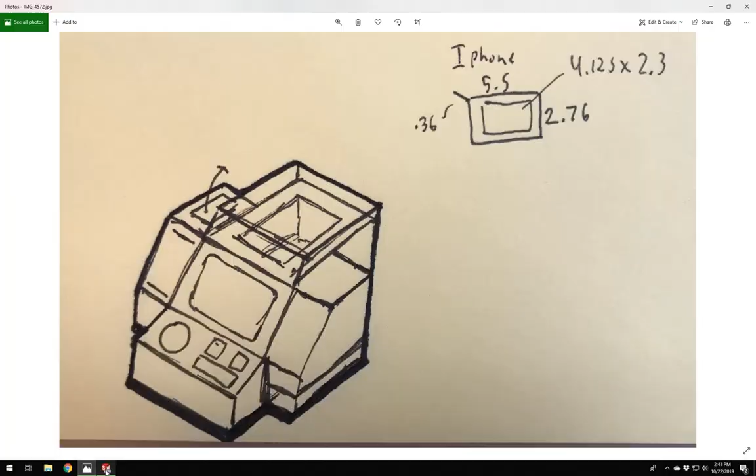And so now we have to decide how we want to begin. What we're going to do is we're first going to model this center section, and we'll attach these two side boxes. We're going to model the big side panels first, and then just connect everything in between. So the first step we actually want to do is we're going to begin on the top plane.

We're just going to make a sketch, and this is going to help us define the size of our object. So we're going to pull out a rectangle, pretty straightforward. Let's make it 14 inches deep and 10 inches wide. And so this seems like a pretty good place to start.

Our sketch is now fully defined. You can see that all our lines are black. Exit the sketch, swing back to isometric view.

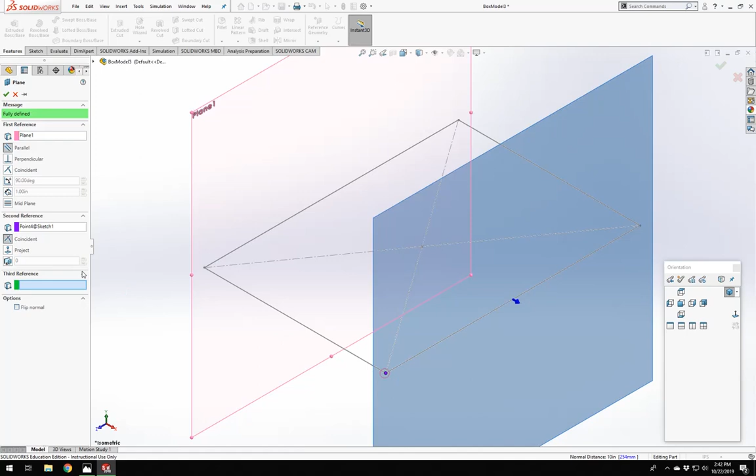So now, in order to do side panels, we're going to create some reference geometry - two planes, which will basically be the sides, the sidemost extents of our rice cooker. So we're going to go with the right plane, and we're going to bring that out to this line, and we're going to do the same thing out to that line. And we can do it off of plane 1 or the right plane - it won't matter in this case.

So now we've got these two planes, sort of TIE fighter shape, I guess. But say we wanted this to be slightly wider. A really easy way to do this is if we just click on sketch 1 - don't actually edit it, just click it - it'll bring up its dimensions. If we double click on one of those, we can edit them. And so we can say we actually want this to be 12 inches.

So we enter 12, we hit enter. And then I'm going to hit Control B, same as clicking this button up here, which just rebuilds, so it'll refresh what we're seeing.

So now we've got our size correct. So now it's time that we actually start modeling each panel.

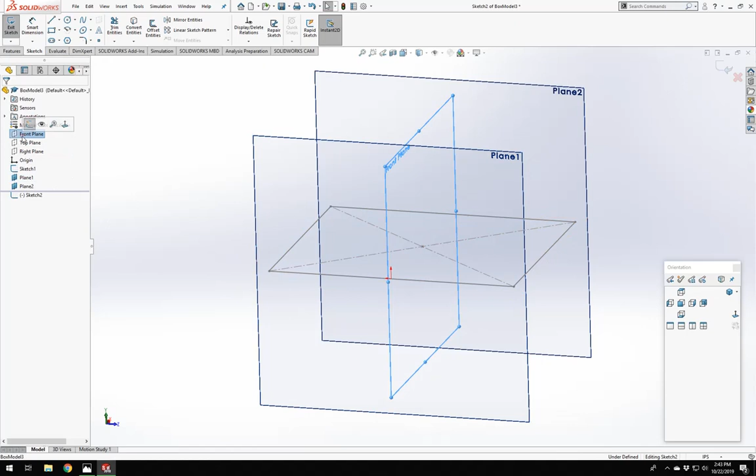We're going to start on plane 1 and say sketch, view that normal. I'm actually going to flip it around, so our front view here is going to be to the right. So when we view our sketch normally, our front is going to be over here.

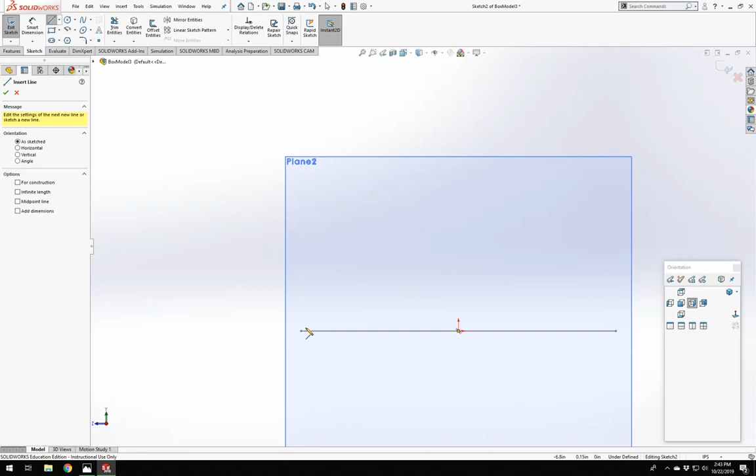What we're going to do is also treat the top plane as the bottom, as the ground plane. Really quickly, roughing it, we're just going to draw in our shape, sort of that shape. There, we've got our basic form here.

And so now we probably want to go in and start defining sizes and dimensions. One thing we're also going to do is add some feet to this. Most products don't actually sit straight on the ground, most sit off on some little raised portion, so we're going to add in some little feet.

So let's go ahead and start throwing some dimensions on here. A lot of these dimensions are going to be arbitrary, or just what seems right for this demo. If I was really planning this out, I'd probably find a similar object that exists and measure it to see what makes sense - go find a rice cooker and see what makes sense in terms of volumes. In this case, I'm just going to mark some things out.

So we'll do that, back one is 10 inches. This one is 4. Let's see. We'll make this slant 5 inches here tall. 8 inches there. There may be some periods where I'm not talking.

I'm trying to talk through this, but sometimes it can get a little difficult to talk through a model.

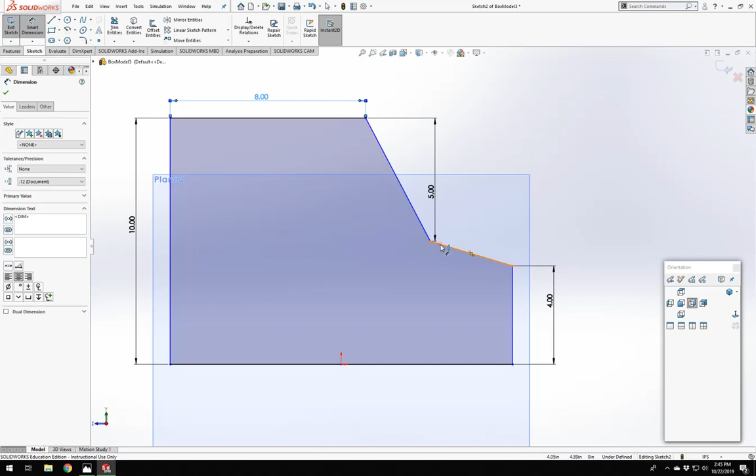Whoops, I think I'm slightly off. So we want to make sure that we are coincident with things.

Also, now I realize I'm on the wrong side. Whoops. Yep, totally building this backwards. That happens. So let's see if I can flip this around. This may end up kind of strange for a moment, but it's good to get this kind of stuff resolved early on.

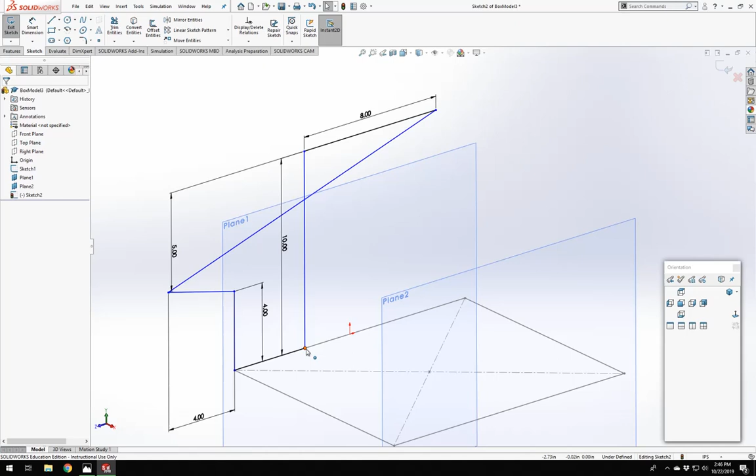We'll reduce problems later. Because I really do want the front view of this to be my front.

Oh, now we have a total mess here. There we go.

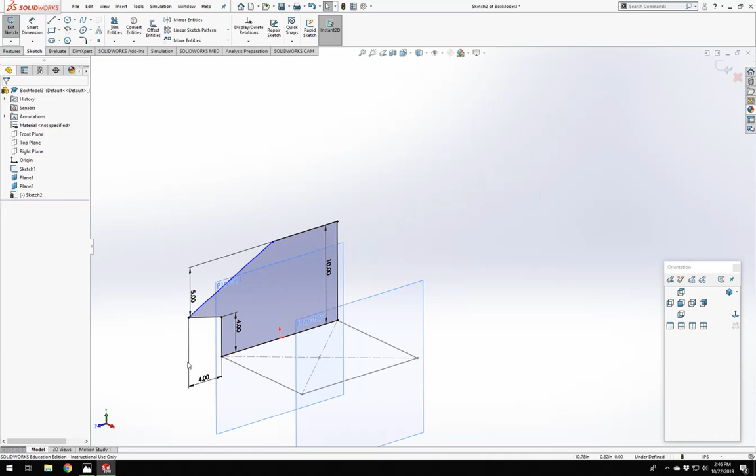Oh, let's see if I can do this. Another way of fixing something like this is by double-clicking on it and then clicking reverse dimension. There we go, just like that, rather than deleting it and drawing it back in.

Ah, look at that, now we're nicely fully defined. Mainly that was setting those bottom points. And so by setting those bottom points to this original sketch, that's really quite helpful, because now if we want to change the length and width, we can do that all from that sketch 1. We may even go back in and rename sketch 1 as something like main size, just so that we know what that is.

So great, we've got our form here, but now we want to add those feet. An easy way of adding feet to a model like this is just some simple cutouts. We'll end up doing something similar on the front and back, so we'll end up with sort of a faux square foot. Just delete that in between, probably throw some dimensions on there.

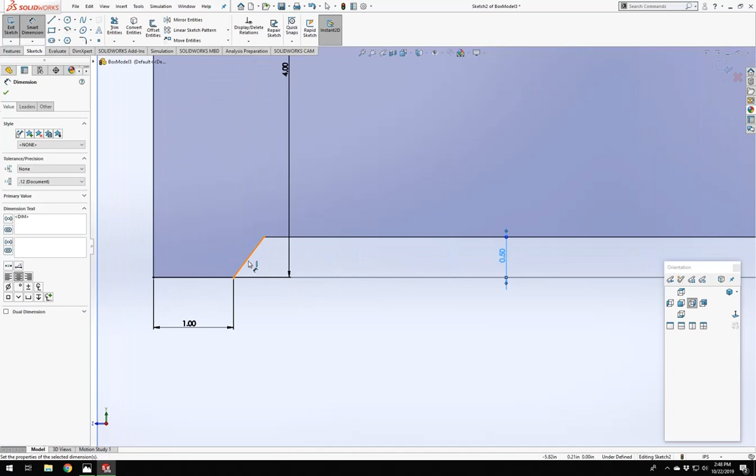So make those equal. Give that some dimension. And probably an angle here, maybe? Let's try an angle - 60 degrees, that seems good.

There we go, fully defined. If we exit the sketch, you'll notice that we don't have a dash next to it - we're nice and fully defined.

Great, so now we can make the first extrusion of our box model. This particular extrusion becomes very important. So we're going to make this one 0.15 inches deep. We don't know our material thickness that we're going to be making this out of yet - we might be making this out of a chipboard or cardboard or something - but so we're going to give it a dimension to begin with.

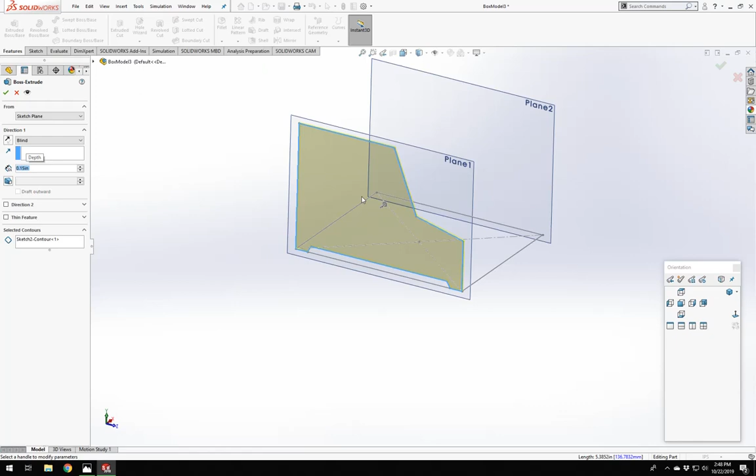So we've got this dimension on here for this first extrusion. This is where the parametrics of SolidWorks can become really powerful. We're going to click on this extrusion, and you'll notice we have this dimension here. It's blue because it's not necessarily defined or attached to something, so we can easily change it. If we double click on this dimension, we get this window.

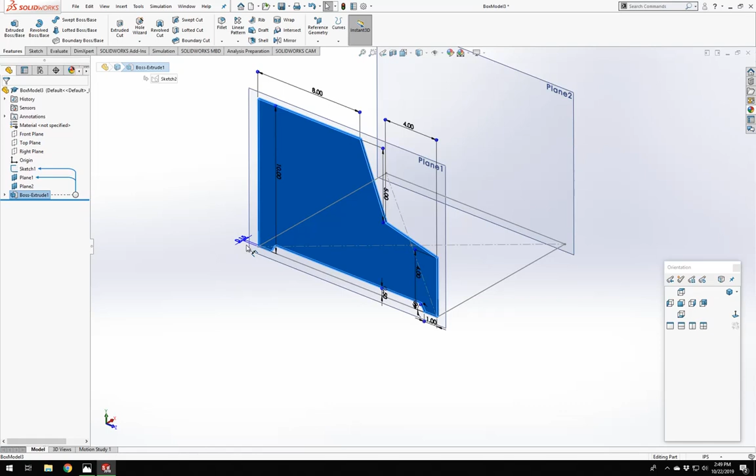I'm going to show you how to get that again. I'll cancel out, click once on the extrusion feature, and then double click onto that dimension. So we have this window here, and it tells us the name of what that actual dimension is and its value.

What we're going to do is hit the equal sign, and we're going to call this thing 'mat', for material thickness. We've got this little symbol here that says create global variable. We're in yellow, so if we hit enter, it gives us this prompt: create a new global variable, mat, and we say yes. Now you'll notice we've got this little globe symbol and our number, so we click OK.

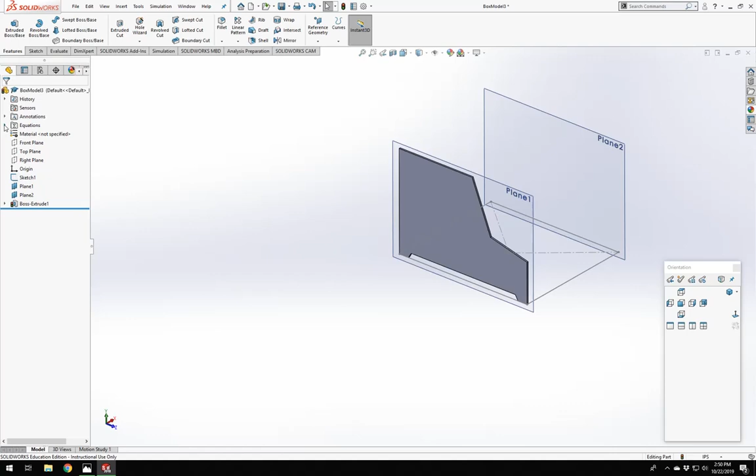You'll notice we now have an equation, a sum symbol next to our dimension, and in our feature tree we have this box that says equations. If we drop that down, we've got mat equals 0.15. If we want to edit this, we can right-click, click Manage Equations, and this brings up all our equations in our document.

So our global variable, mat, is equal to 0.15, and that evaluates to 0.15. If this was some sort of equation, multiplication or whatnot, it would evaluate to whatever the final number is. And then we have the equation here that D1, dimension 1 at Boss-Extrude1, is equal to mat, our global variable, and it evaluates to 0.15.

This is the place where we can actually change this as well. So in this value equation section, if we wanted to change that to 0.2, we'd do that here. But we're going to hit OK for now, and we're going to save.

So now we've got this value, and we can reference it. We can call it, and then if we update it, all of them update. It can be very, very handy, and this is what allows us to build really strong parametrics into our design.

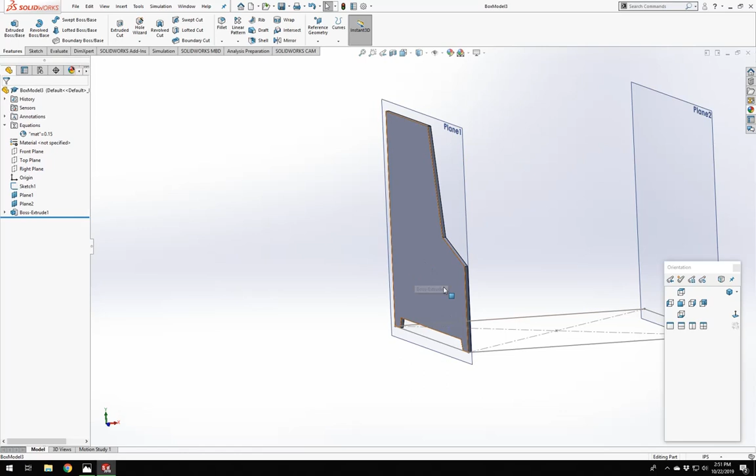So I've got this panel here, and I know, because I've done this a bunch, that I'm probably going to want this side panel to be a couple sheets maybe, so maybe it'll be 2 sheets thick, just to give our thing some structure. So I'm going to click on this panel, on the inside of this panel, so I want to be one on the inside.

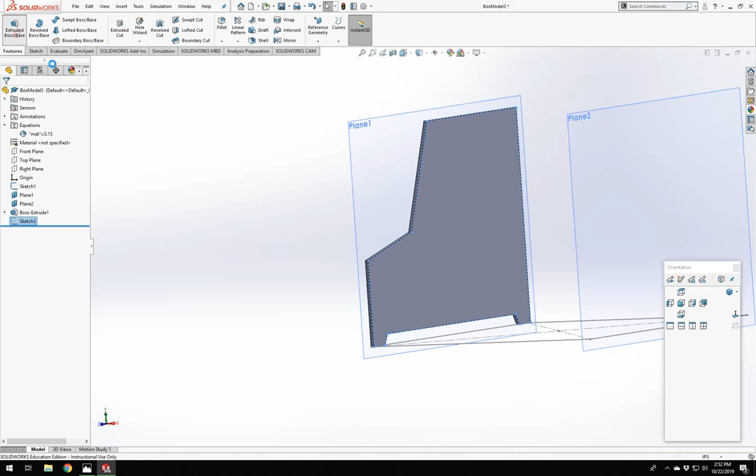I'm just going to hit sketch, then click on it again, and hit convert entities. So I've converted that outline. I can then exit the sketch, extrude this, but instead of 0.15 here, I'm going to say equals, scroll down one to global variables, and click mat.

I do not want to merge results. I want this to be a separate panel. So now I can click check. So now what I've done is I've created a second body. In solid bodies, we've got 2 bodies now, and this one is also defined by this mat thickness.

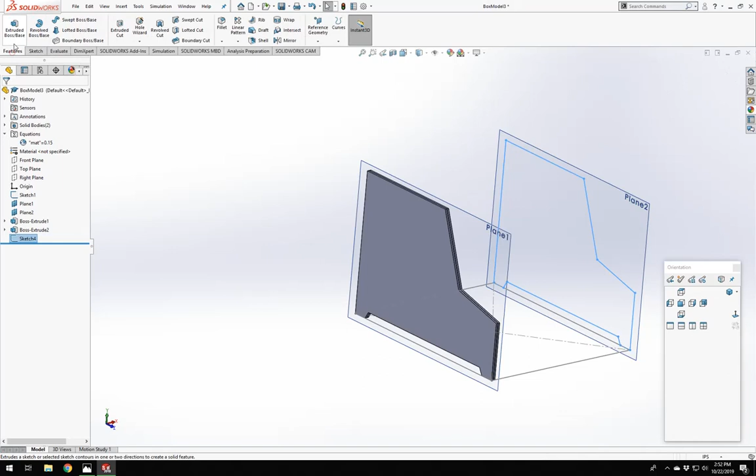Cool, so now we've got this side. Let's come over to plane 2, sketch. We're going to do basically the same thing: a convert entities of this outer panel. There it is. We're going to exit the sketch, extrude, and extrude inward that way, using our mat variable.

There we go. So now we've got 3 bodies. An alternative to doing that extrusion: so if we undo a bit here, we're going to undo ourselves back. Another option would be just doing something as simple as mirror, because we're working around that right plane, right? We pulled those 2 planes off.

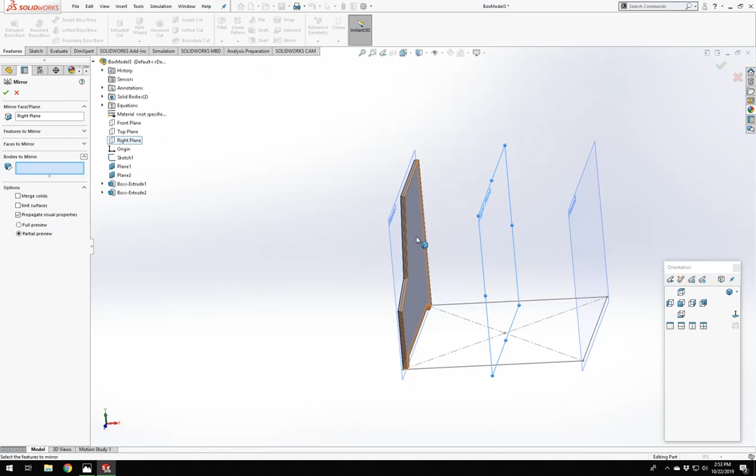I can actually select the right plane to mirror around, select bodies to mirror, and then just select 1 and 2 and hit enter. So now we've got these 2 bodies, and these are based on the mirror. And so they will also continue to mirror if we change the material thickness. And so we now have 2 sides to our object, which is great.

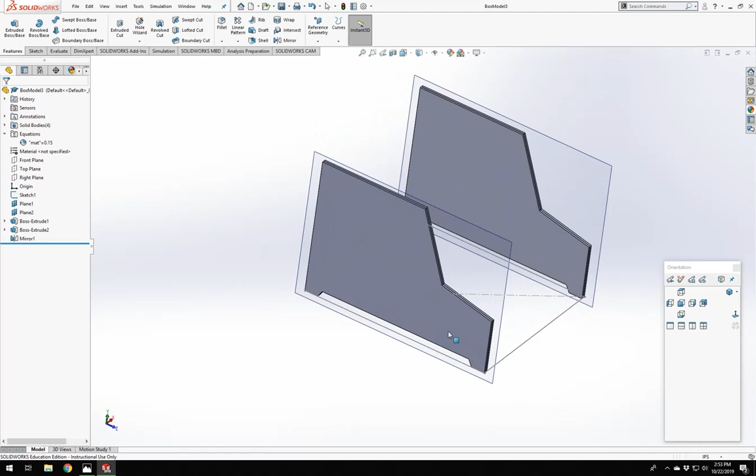So the next thing we'll want to do is add in this panel here, the panel that will fit on the front. We're going to add in the panel that fits on this angled surface, the top, the back, and we're also going to do a bottom in this case as well. And that'll give us our basic shape, and we'll start doing some detailing along the way.

So let's do the front panel. This one's easy. So what we're going to do is select a surface, probably that one will do quite well, that we want this panel to be flush with. We're going to hit sketch, and we're going to draw out the panel.

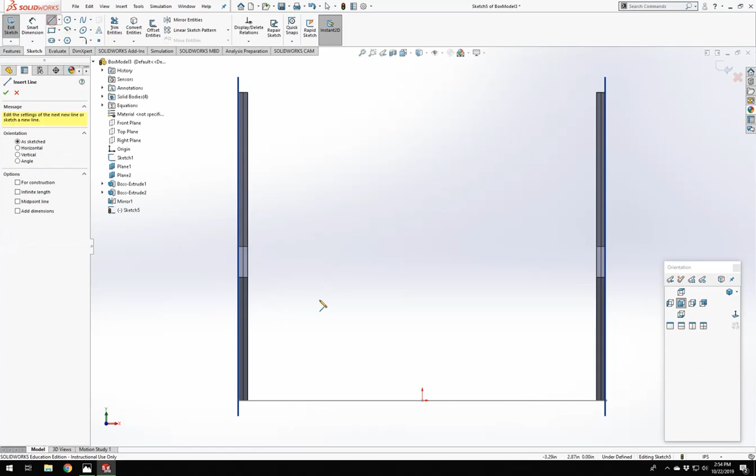So this panel, we're going to add some fingers to. These are not finger joints in the way that we would do in woodworking, where the actual friction of the joint is holding it together. These are more just for indexing purposes. These will help us with our assembly later on. So I could draw this out as a rectangle, multiple rectangles and trim, but I actually like to draw these out pretty quickly by line.

Works quite well. So this one's going to be almost to the top. We'll do it to the top. We may have to come back and make some adjustments as we go of that front panel. And so we do these fingers that extend in, and then we'll do across. And there. So we have the basic shape of our front panel there.

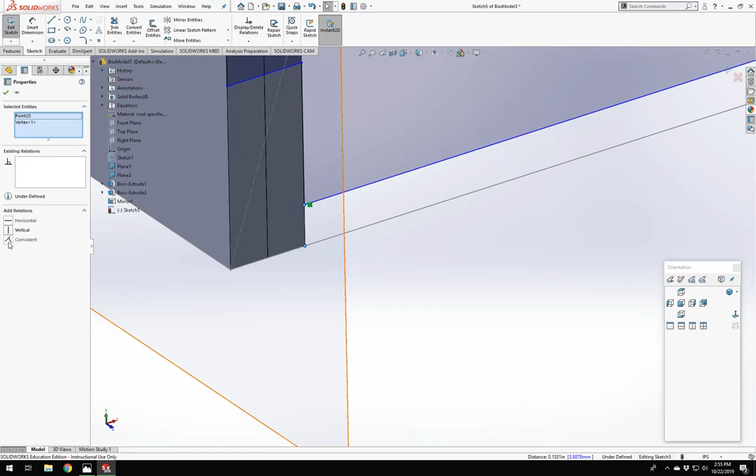But some things we know about this front panel is that we want this front bottom portion of it to actually go all the way down. So we can actually make that coincident. There we go. Coincident there.

And then, let me just check. Yep, looks like we're still recording.

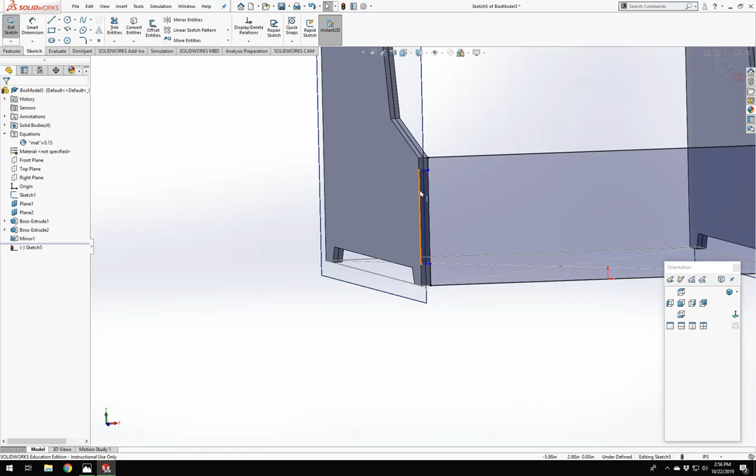So we have ourselves coincident there. And then we are going to add our feet in to this as well in a moment. We want this line and this line to be equal. We want probably that line and that line to be equal. So we're just setting up some relationships here. And same goes for the bottoms.

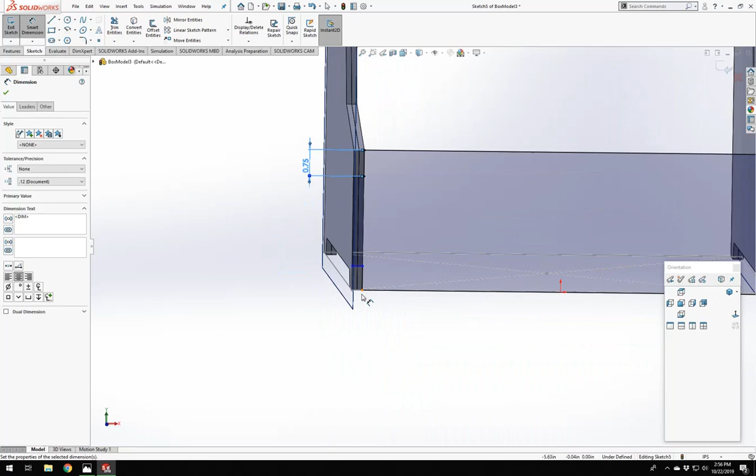All right, cool. So now we're going to define some measurements. Let's go with an offset on this top one. We'll make that 0.75 there. The bottom one we're going to want to be, I think, a little higher. Or it could be the same. Let's make it the same. We'll make those equal. Pretty straightforward.

We're now going to add in those feet, though, in a very similar manner to what we did on the outside. But one of the key differences is that we actually want these feet to visually appear square once we assembled this. So if you remember, that distance was 1 inch between that point and the corner. And so we want this distance from this point to the corner to also be 1 inch. And so we can do that. We want it to be 1 inch.

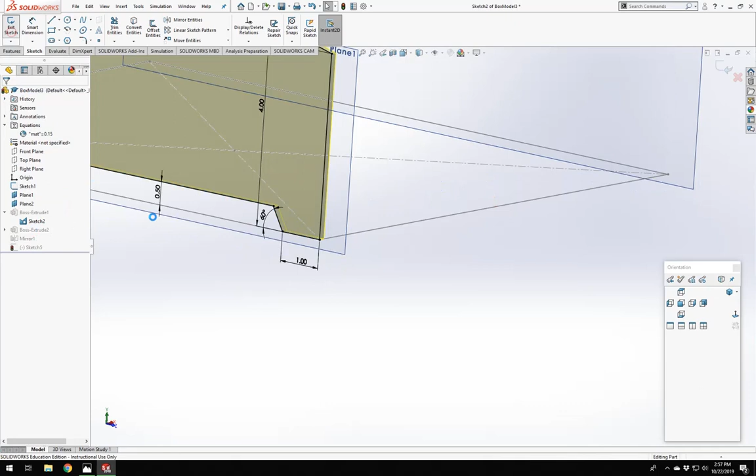But one of the critical things with this is we really want these to be responsive to each other. So if I change that foot size to be larger, ideally I would like it to refresh with it. Whoops. That was not how I wanted that to go. Let's edit that sketch again, if I can remember how to do this. We could create a global variable to do this. We may be able to do it even after we extrude it and just set it to be something.

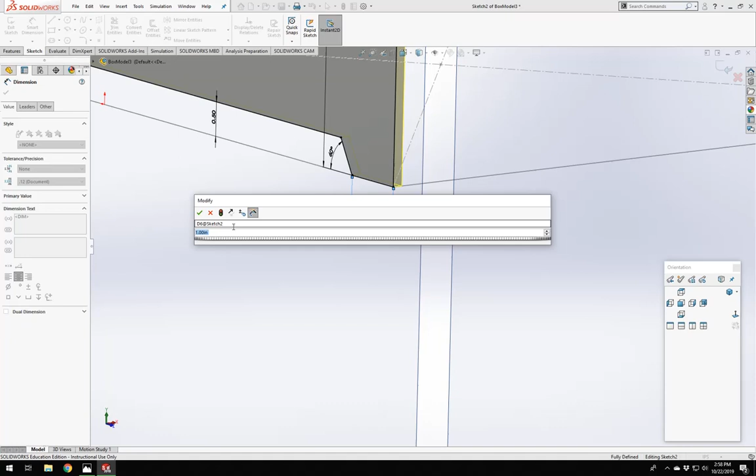Let's try this real quick. If I copy the name, maybe not. There are a couple ways of doing this. It's a matter of just clicking things in the right order. But maybe we'll make a global. Let's make a global variable, being that we know how to do that. So if we set equal, we can say equal. We're going to call it foot.

So we'll create a global variable called foot, which may get confusing, like 1 foot versus inches, but we'll be okay. We know what they are. And so now in this sketch, I can come in and say this thing is equal to foot. Whoops, not mat, but foot. One of the key things with putting in global variables is that at this point, if I click this checkbox, it will not be the global variable. I need to click that checkbox first or hit enter, and then I can click that. Now we're linked properly.

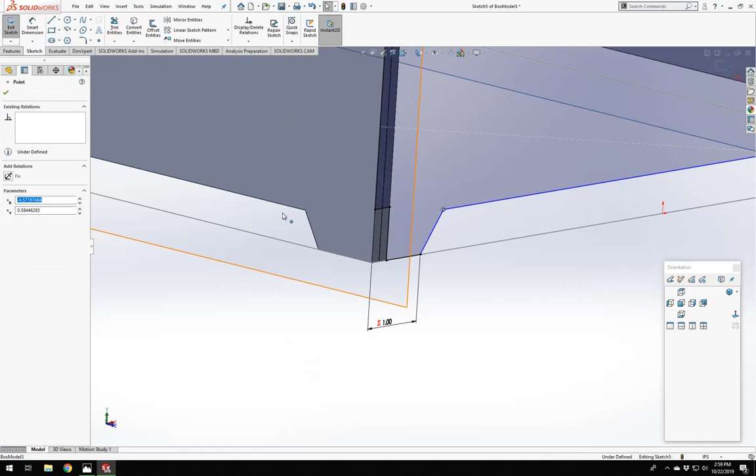So let me go back, edit the sketch. So now we've got this global variable that if I change this one, will also change this one, and so the feet will always be consistent. Then we'll take this and set it to be that point to that one. We don't want it to be pierced. We really just want it to be the same height. So we may need to grab this inside edge. Sometimes it's just a matter of clicking around. We make those two collinear. So now our height of that offset is the same.

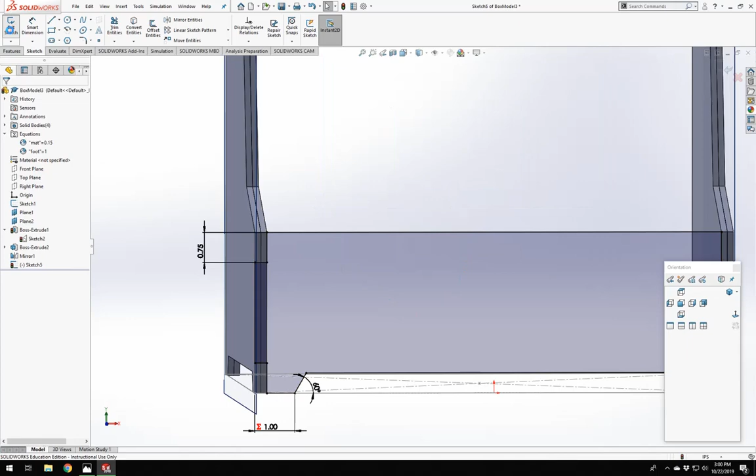And then we'll probably just throw in the same 60 degrees that we know that is. Make this one equal to that one. Oops. I think we're going to need a dimension there, or just make that line equal to that line. There we go. Looking pretty good. Can exit. So now we've got this shape.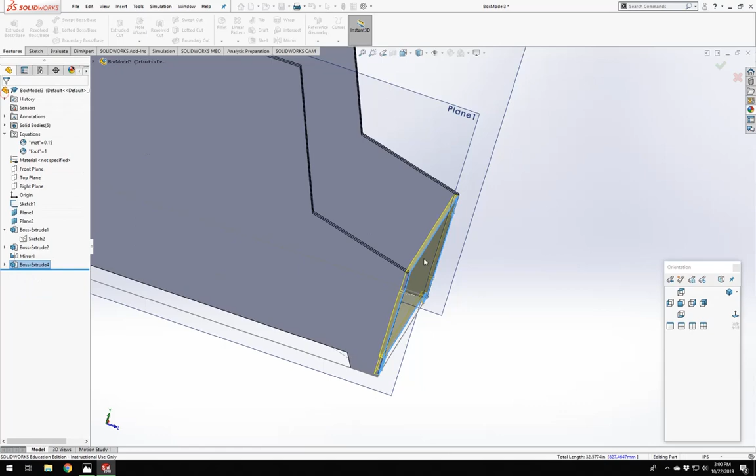We're going to do the features, extrude. We're going to extrude inward like that. And we're going to make it our global variable and not merge it. So now we have this other body. That's going to be our front panel. It's going to fit in really nicely. We'll be able to glue it on this inside surface. Everything will be great.

Now what we actually need, though, is to remove the material in our side panels so that this will fit in correctly. There are a couple ways of doing that. We could draw on the front face. We could draw on the side. Ideally, what we'll do is we'll draw on the side, and we'll actually draw all of these cutouts together. So we can do it all at once, and I think that's what we'll end up doing: we'll wait till the end and just do it all at once.

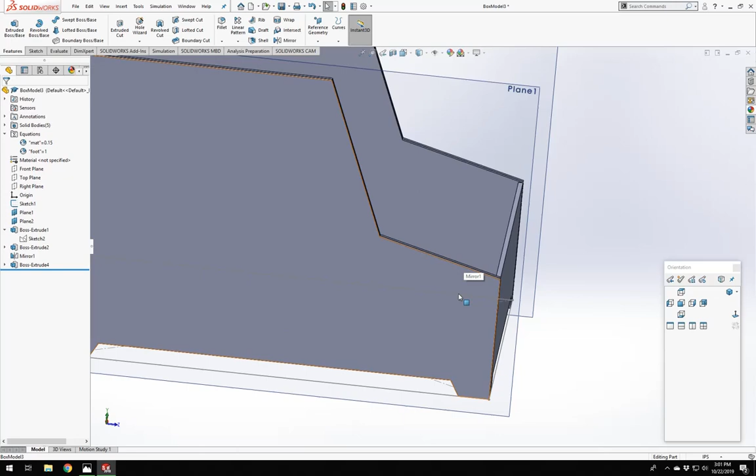So now taking a look at this, we are going to run into an issue. And I'm going to let us run into it, and then we'll go back and resolve it, because we can in a feature-based modeling software. So first thing I'm going to do is save. Always, after every body you make, just save. So now we're up to like 5 bodies. And so we may want to start naming some things.

Like this part we may call left side outer. This one is the left side inner. The mirrors here, we've got, let's see, right side. And to rename that, I'm just holding down a click, like a slightly long click tends to work on there. So that's right side outer. And this is going to be front.

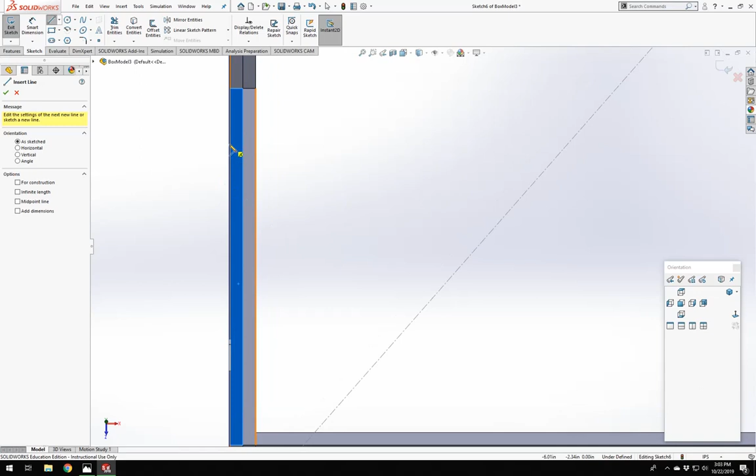So I have these named. We definitely want to name things as we go. So we've got our panels now. I'm going to save. All right. So the next step is we're going to add the panel that goes across this top. So we're going to begin a very similar way. We're going to sketch. We're going to begin with some lines. Same idea with the fingers.

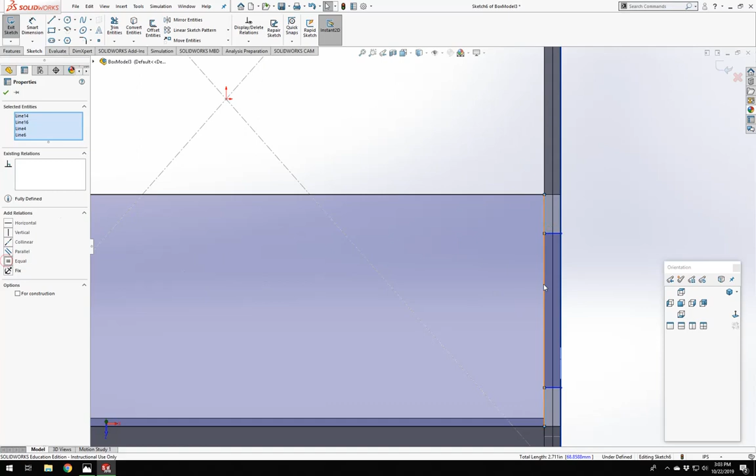Okay, whoops. Come all the way down. There we go. I'm going to make these 4 equal. We're going to need to just pick a dimension. I think we're using 0.75. And so we might even set up that as a global variable if we wanted to, some sort of offset. So there we go. We've got our part.

We're going to extrude down. We don't want to merge the result. We want this to be equal to our global variable. I'm going to make sure we're going down. We're going to say OK. So now we run into some problems. These two panels, although they look great here, actually, if we do a section cut, let's try that from the side if it'll show us what we want to see. Yeah. You can see that these two panels are actually going to impact each other. They're going to share the same space.

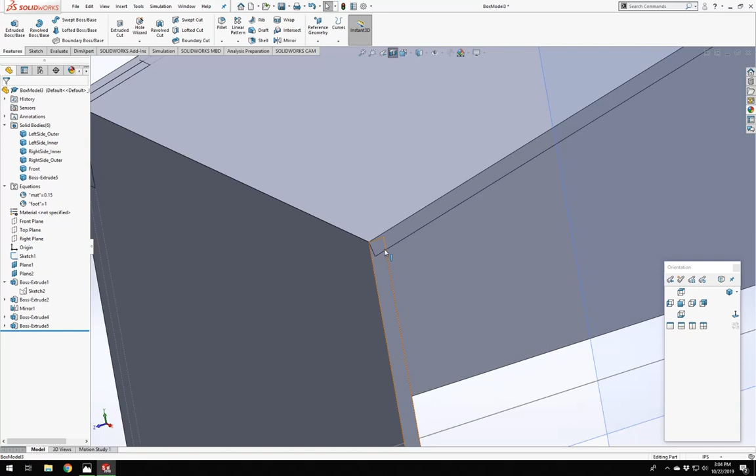This doesn't work because physics. And so we're actually going to have to make sure that we cut this panel, this front panel, down. So why are we cutting the front panel down instead of this top panel back? Has to do with sort of an aesthetic approach to these. It's nice that panels, particularly ones that you're interacting on, are as flat and smooth as possible. And so in this case, we'll cut this one down. It's also a pretty easy thing to do.

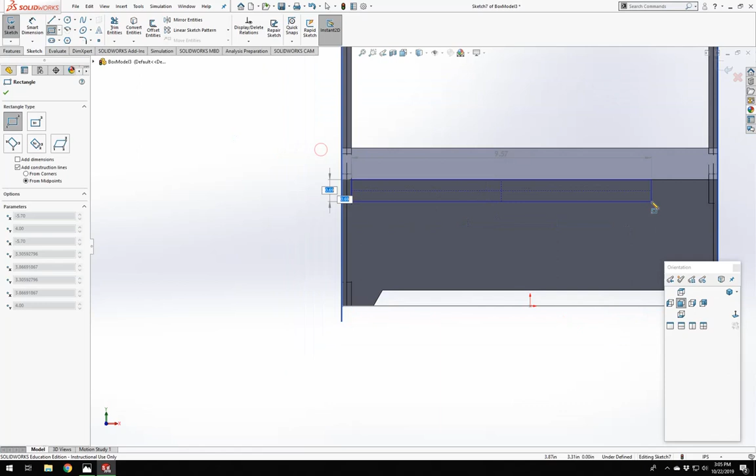So the way we're going to do this actually can get kind of clever. So we're going to hit sketch on this surface. We know that we're going to be cutting down from the top here to some point. And this is where we can actually reference things that we've already made. So we're going to hide the front for a moment. And we can see that where this is actually going to cut into it will not be any larger than that line, that bottom edge. So if we select that bottom edge, and we say collinear, we can bring our front back.

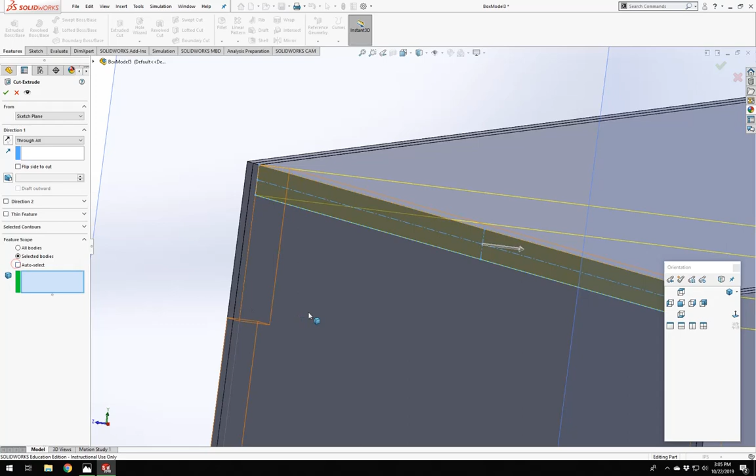Exit. We'll do an extrude cut. We'll say go through all, so we don't even have to think about it. Make sure that our feature scope, though, is only selecting that front one. So now we can cut. And so now if we go back and we look at our section view again, you'll notice that we're not impacting. And this is still a fine joint. It'll look nice. And we can still come in and get some glue on the back, and that'll be great.

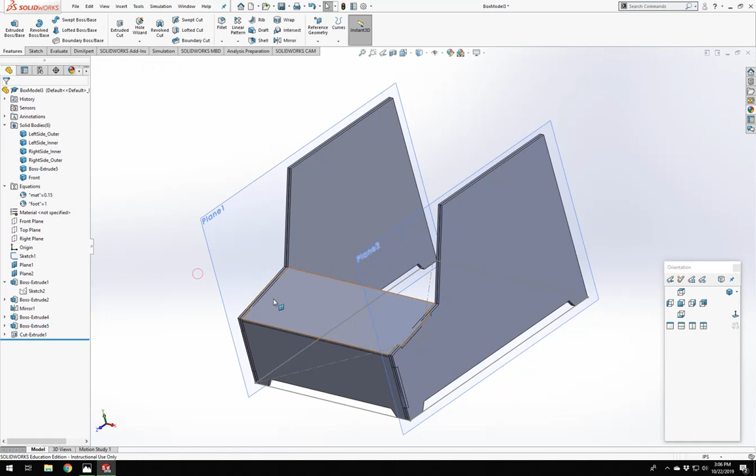Cool, so we've got our second panel in. Now let's do our third. I think we'll go around the whole thing first, and then we'll start adding in some additional things. This panel is going to need a couple underneath it to add those buttons. The front panel will need some stuff behind it to support the phone, but let's just get our basic panels in first. So we're going to do that. Basically the exact same idea.

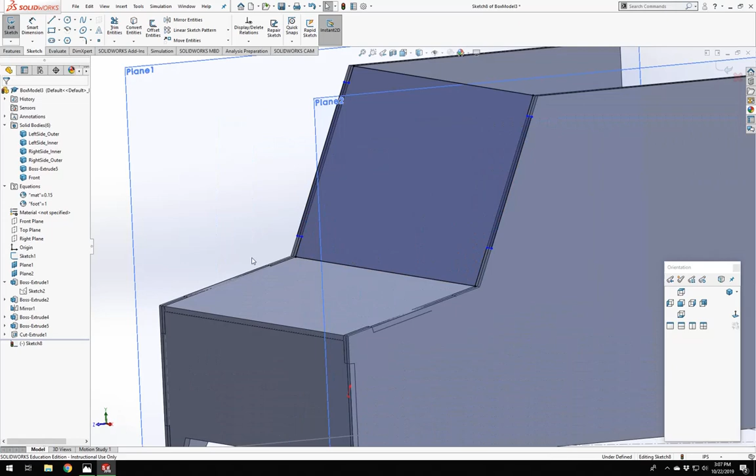And you'll notice on this panel, I've just come down directly to this edge. I don't have to worry too much because both these panels are going back from sort of, would that be like a concave shape, I guess. And so because they're both going back in a direction, they're not going to impact each other.

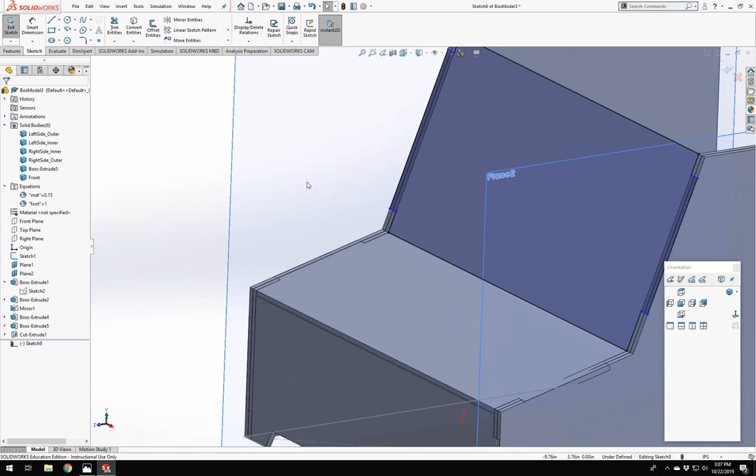You could do more than one finger on these. I'm just doing one because it generally serves the purpose, at least for these lay-in kind of style. We'll do some others later that are actually going to punch through this surface. And in those cases, we kind of want multiple small ones versus one big one. But for these, the one big finger is just fine. Does a great job for helping us index, just sort of holding things together as we glue.

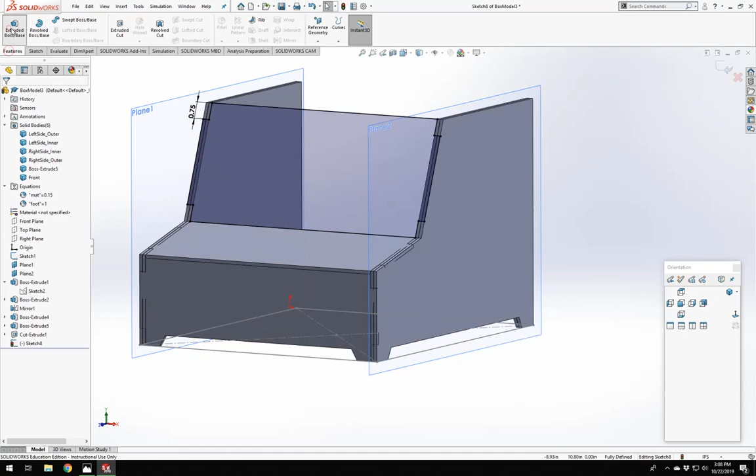We can just make all of those equal. Good to go. Do our extrusion, flip it. Make that equal to our global variable. So we've got that panel. We'll now do the top one.

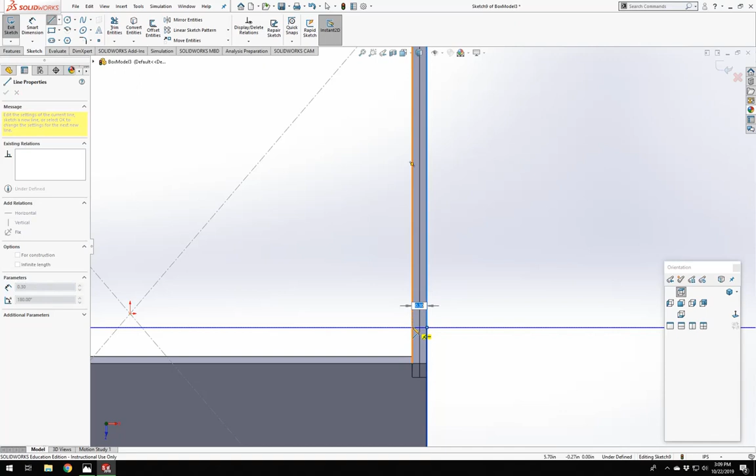We're going to do the top one slightly differently. The difference with our top one is that we're going to put a finger on it so that it engages both the front and the back as well. And this will let it just kind of drop in place nicely. How you do these is really up to you, though. I'm just showing you kind of one method.

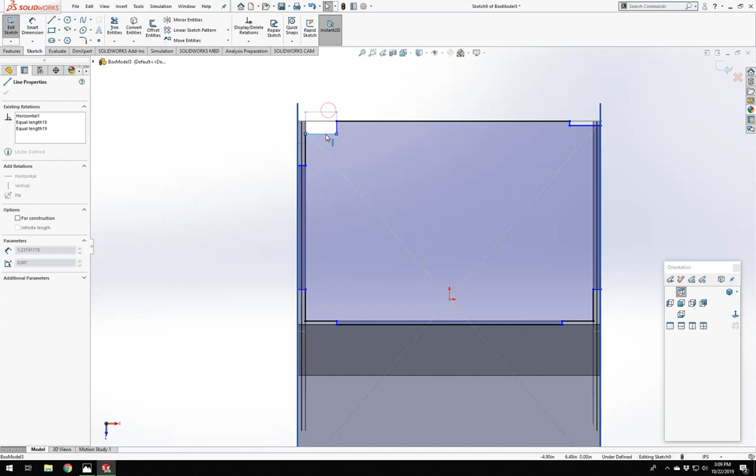One of the things you can do if you are extremely paranoid that you're going to assemble something wrong, you can either make things assemble only in one way, so having fingers of different sizes in certain locations, or making things so symmetric that they can be assembled in any way. It's sort of up to you. Sometimes it comes in handy to have something be very specific in how it gets assembled. All right, so let's throw a dimension on one of these. They all should be kind of equal to each other at the moment.

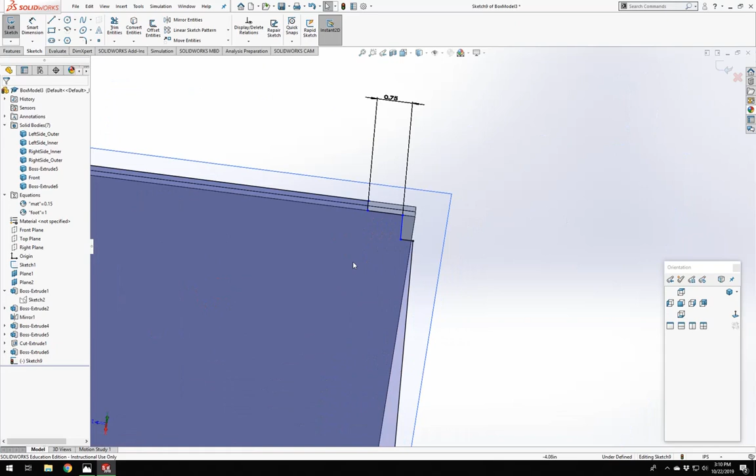There we go. So this side's already handled really nicely. So that will go down into this one slightly. We'll have to cut out a piece on that. That's fine. On the back one, we haven't yet defined what that back panel is going to look like, but we do know how it's going to work.

So in this case, what we can actually do is just set this value to be equal to mat. Whoops. There we go. Set it equal to our global variable, just like that. And so we know that that panel is going to be that thickness, and so we'll make sure that this always adjusts to it. In this case, we'll want to make those collinear. There we go. Now we're nicely fully defined.

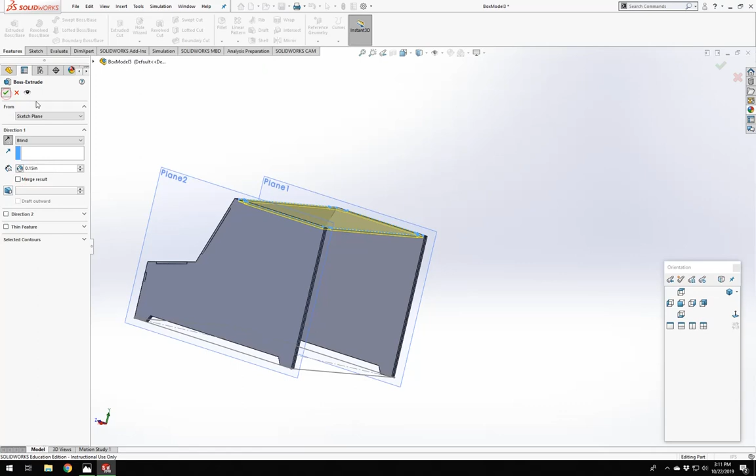Extrude, we're going down with this one. Again, equal to our global variable. And so we're going to save, always save. And if we go into manage equations now, we can see all these instances where our material has been used and where our foot has been used. Okay. So looking good so far. We're closing this thing in.

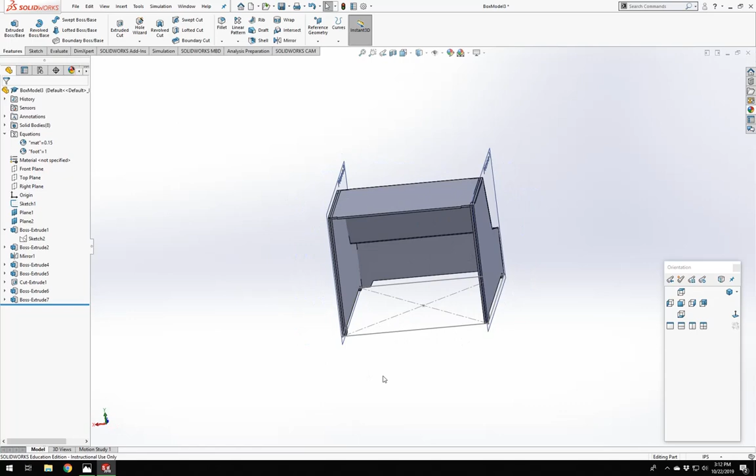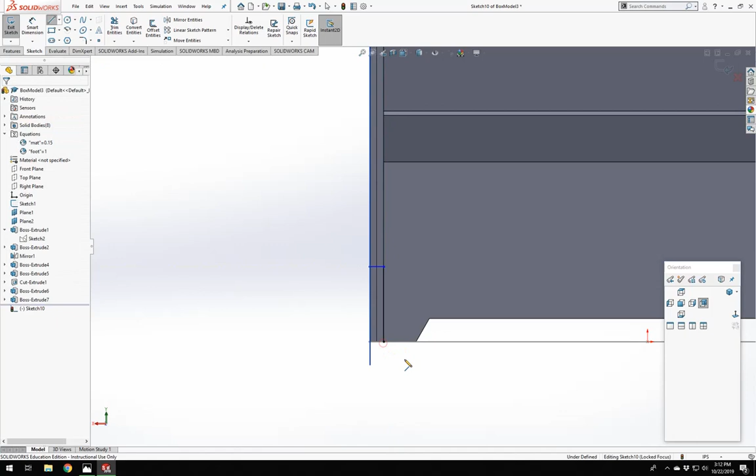So now let's do the back. So the back we're going to do in a very similar way as we've done everything else. But we actually are going to include the cutout for the top panel because we know that it's there. And now let me get this side in. Whoops. That one goes here. It goes all the way down. And we're actually going to make use of our other geometries here.

So we're just going to select these lines off the front because they're going to be the same on the back. We're going to do a convert entities. There we go, looking good. Make these all the same. That 0.75. Should be good. So that's looking quite stellar.

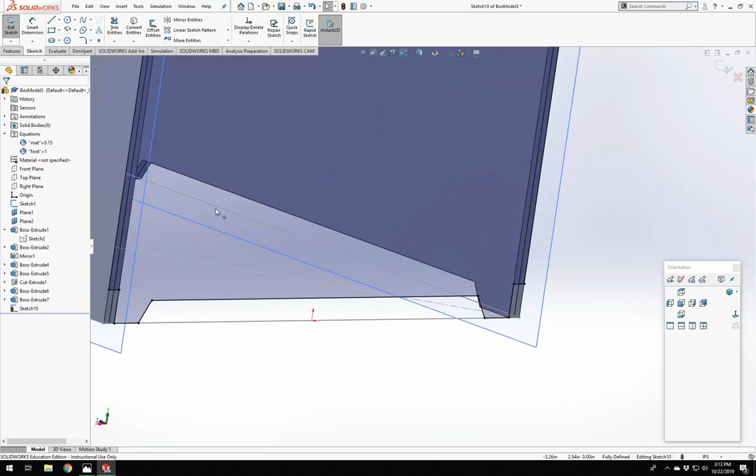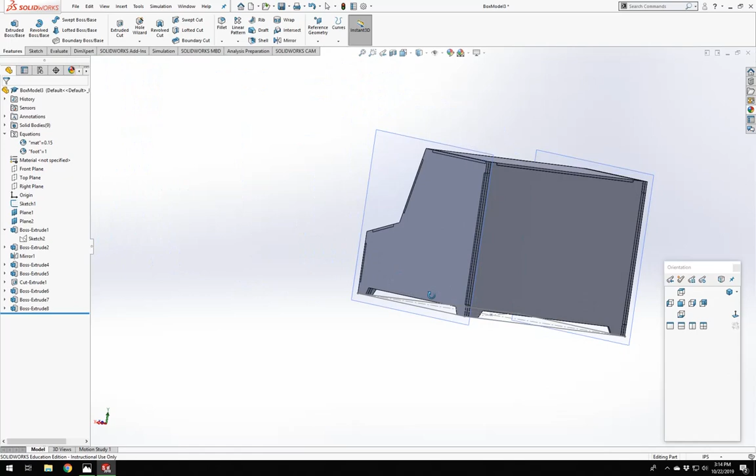Can I exit, do our extrusion? We're going to go the other direction. Do it equal to our material thickness, and extrude that. There we go. So now, finally, we're just going to toss in a bottom, and we'll have our basic form pretty much sort of figured out. And then we'll add complexity.

So in order to do our bottom, we don't want the bottom on the actual bottom. We want it to be sitting slightly on the inside. So we're going to do a plane, probably off the top plane, and maybe we'll go up an inch on the interior of this. So we'll make this plane. We'll then do our sketch. I'm actually going to flip it over.

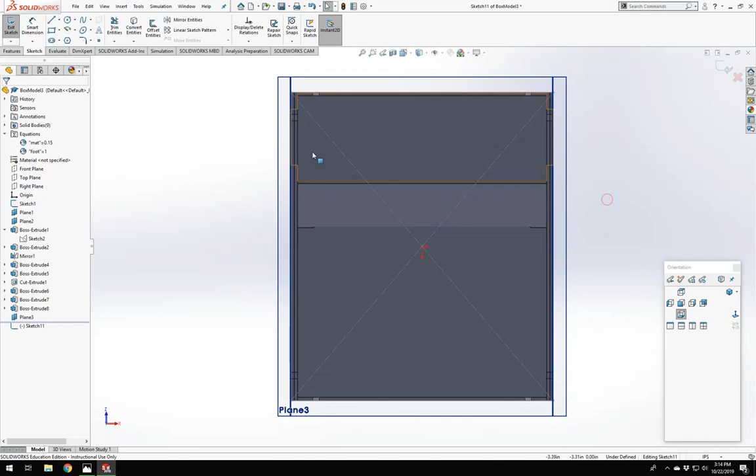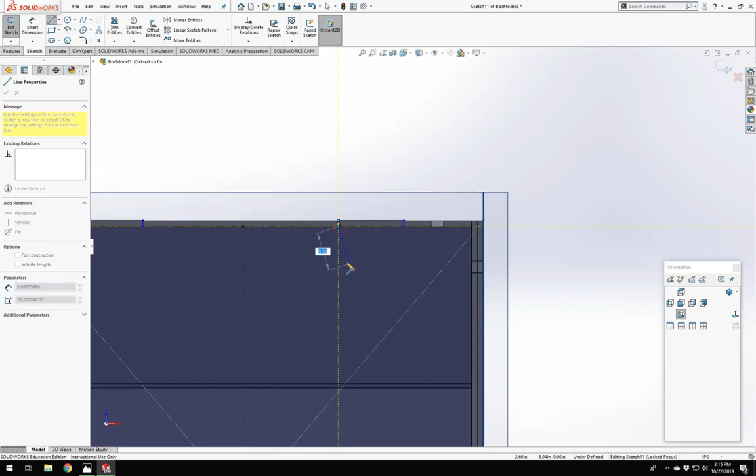And so what we want to do with this is we want it to fill the bottom like so. But we also want it to protrude through just slightly on some of these, just so that we can kind of index it in place. And so to do that, I'm just going to draw some lines. So on the front here, maybe we'll go out a bit from the foot, and we'll do just a couple smaller engagement fingers. Do 2 on each side, and we'll figure out where they're going.

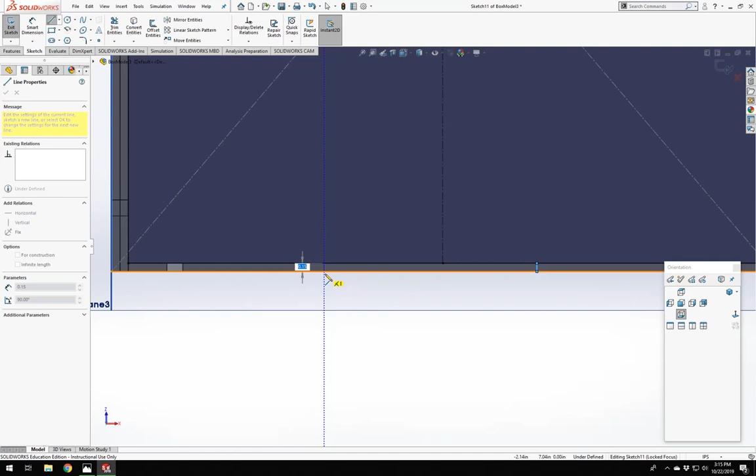Whoops. That one needed to be vertical. There we go. Make all of these nice and equal. Come in with our trim tool. I have it set to trim to closest there. I can just remove, whoops.

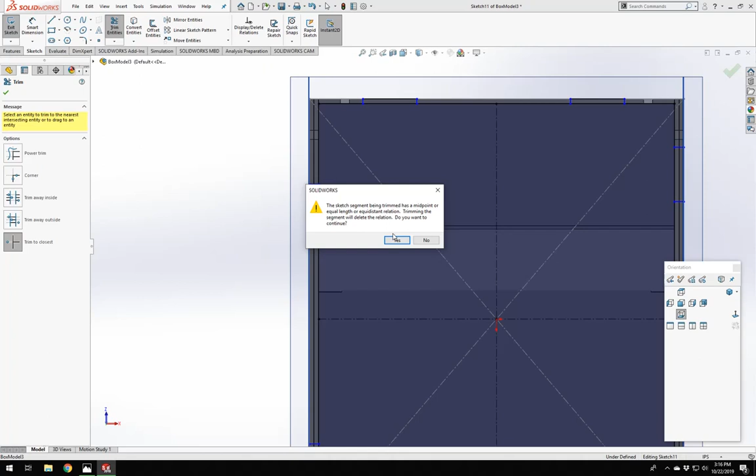I'm breaking some relationship, probably the original rectangle that I drew. But I'm okay with this. It'll yell at me again. There we go. So we've got these lines, which actually we don't need. And a point, it would seem. There we are. So now the next thing to do is to set probably these equal, sort of corner pieces.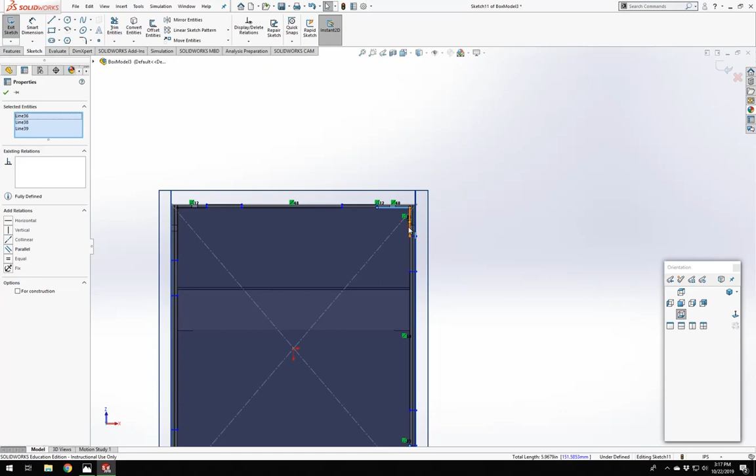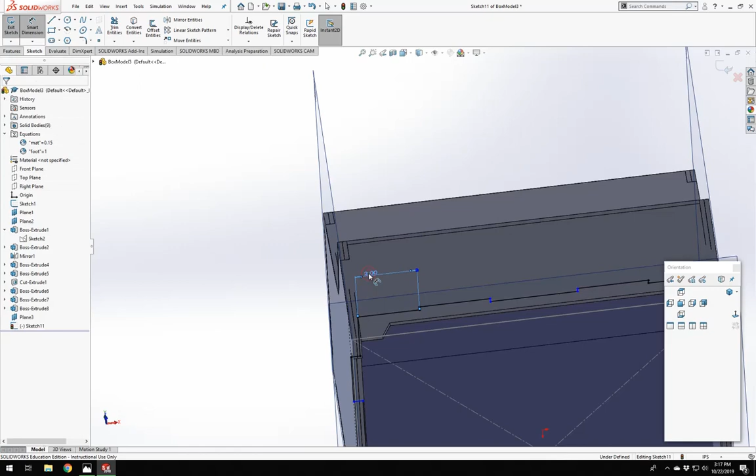Whoops. Did not mean to select the whole thing. Let's try that again. So the corners. Again, we're going to make those equal and pick some dimension. And let's see what 2 looks like. Yeah, let's go 1.5. That works. And we probably want to give that some dimension. We're going to say 1.5 again. There we are. So now we've got all these little teeth.

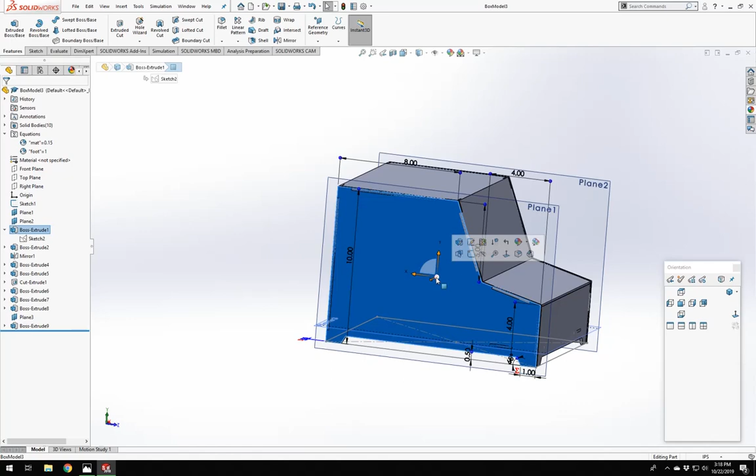We'll exit that sketch. We'll extrude it up. Our material thickness. Don't merge. There we go. Great. So we've got our fully enclosed box at this point. So we're going to save. The next thing I'm going to do is do the cutouts on the sides and any additional cutouts, so that then we can actually, in theory, assemble these pieces. So let's start on this side. This actually becomes pretty straightforward.

What we're going to do is we're going to hide the outer piece. We're just going to select all of these, including the ones for the bottom. So these are essentially what is sticking through. You can see it there. All we have to do is say convert entities.

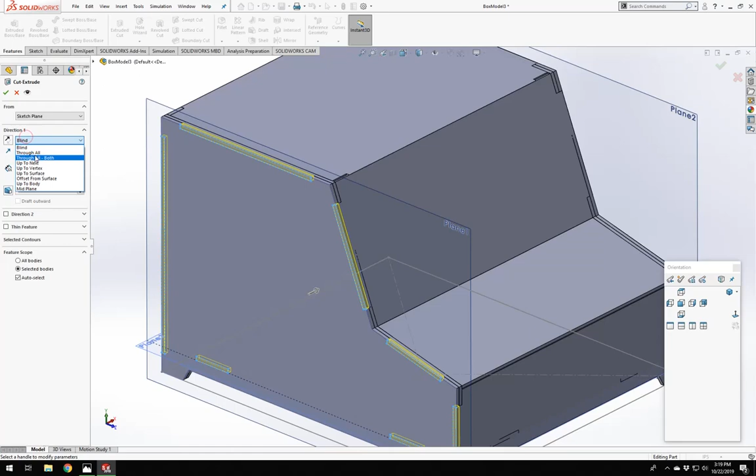We can then unhide our body, exit our sketch, say extrude cut. Because we drew it on this side, we're going to say through all, both ways through, but we specifically just want to select our side panels.

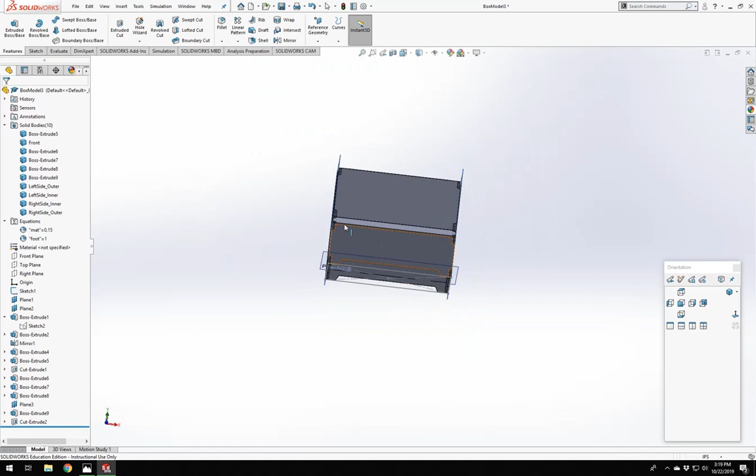And so now we've got all the cuts we need through these, and so it will be assemblable. We still need to do the front here and the back, so let's do that real quick. Won't take long.

Same method, just selecting these existing shapes. By doing this, if we change the size of these, everything will update. And so we'll do an extrude cut. What's great with this is because these actually line up with the ones on the back, we can do a through all here as well.

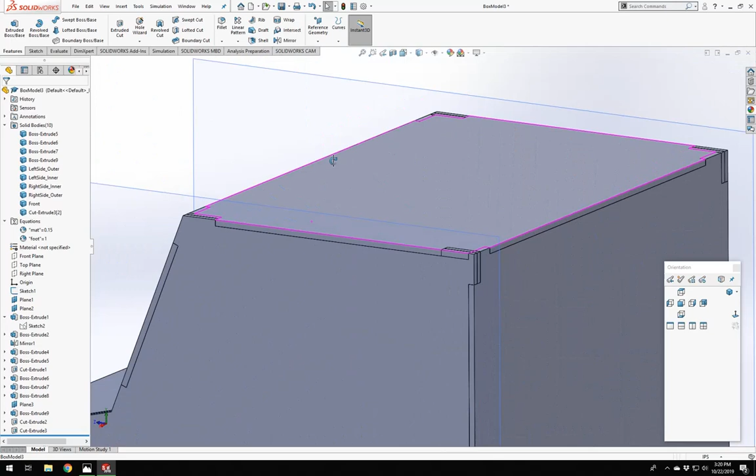So there are those two. And then finally, the last one that we need to do, because we modeled the back one in here, the last one we need to do is this one on the front of this. And we're going to sketch on the front. So we always want to make sure that we're parallel to the cut surface, I guess. You don't want any angled cuts because the laser cutter isn't going to be able to do that. So we wouldn't want to cut on the front surface of that little square.

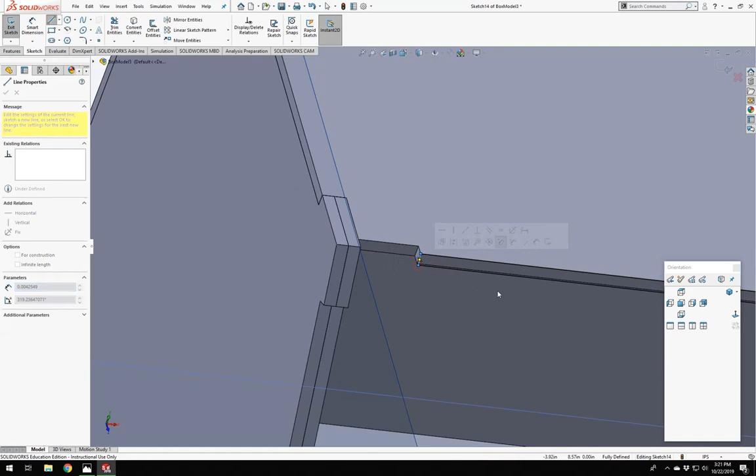And the way we're going to do this one, again, things at angles start to get a little tricky. What we actually want to grab is, I think, this one, that front edge, and that one, the bottom. We can say convert, and then join those two lines together. So now we've got that box.

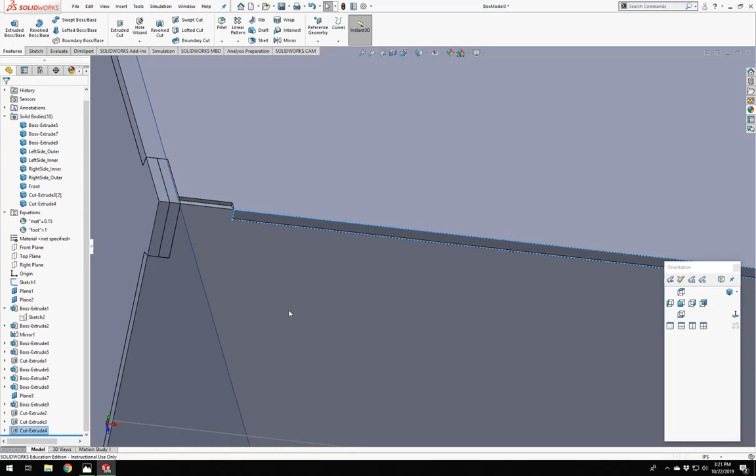And then if we do an extrude cut of this through all but just of this body, you'll now notice that when we look at our side view, that it's perfectly touching. And so this will fit in really quite nicely. We're sort of using that, like, what extents of this thing - what's the biggest dimension that we have to worry about for it to cut through. And we save.

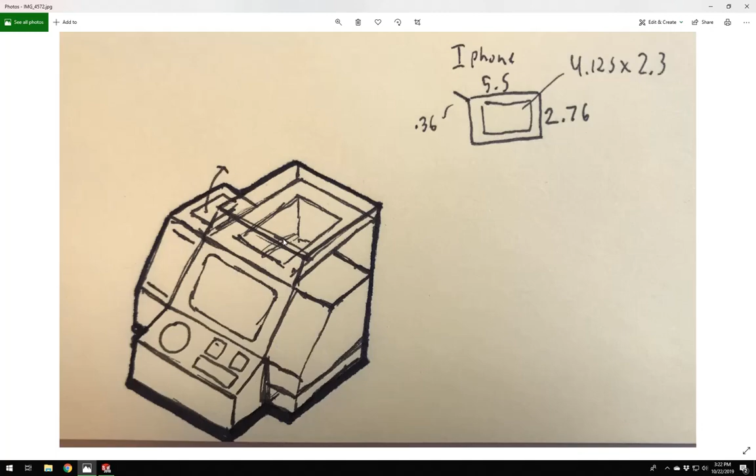So there we go. At this point, we've got our basic box defined. We might say, oh man, you know, these dimensions don't really look right. So when we look at this, it's actually like a little skinnier and that back portion is a bit deeper. So now what we can actually do is we can come in and start making some of these adjustments if we want to, because we're modeled parametrically.

So if we come back to that first sketch, the very first one, we may say, really, I think this thing should be 10 inches wide and 16 inches long. And so we can make that change. We can hit rebuild, boop, and there we are. Everything updates, all our holes and everything, because we have these relationships defined.

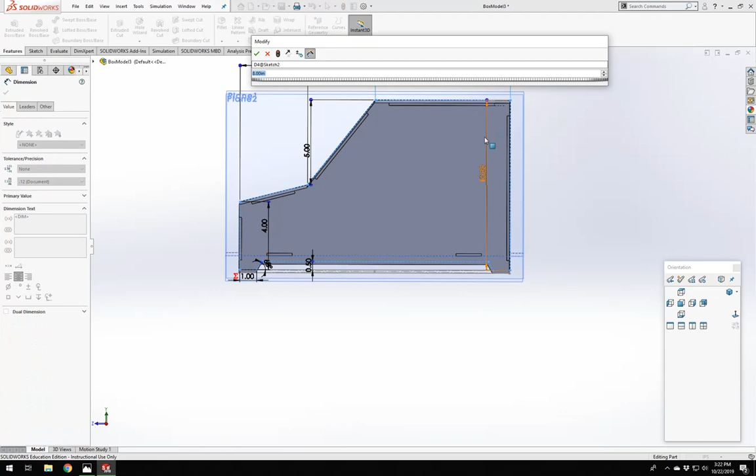Maybe this angle is a bit too steep here, and we actually want that shape to be slightly different. So we can come in here and say, really, let's try to make this 12. Whoop. It's almost vertical at that point. So maybe not quite what we want.

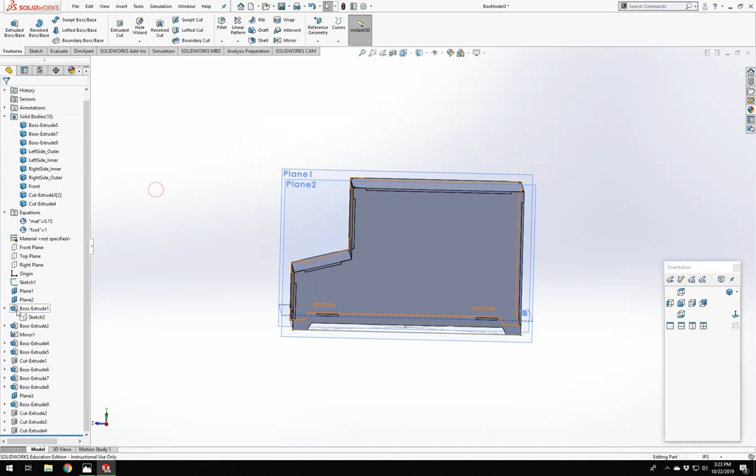We might even define these differently, so rather than using a dimension, using an angle to maintain that. Maybe that's what we'll do. Let's go back in and change how some stuff is defined. So this is a really cool feature of parametric modeling, that we can really go back in and redefine elements of this. So maybe I don't want this to be 5 inches tall like this. Whoops, I don't think that quite adjusted what I wanted it to. But we want this to be controllable a little better by the angle.

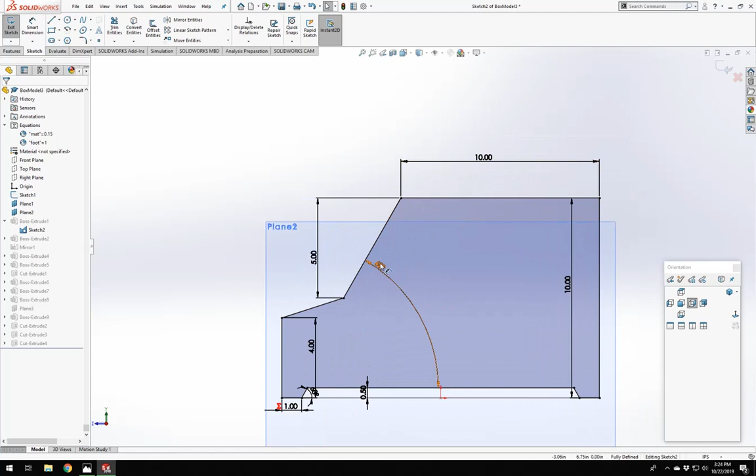Let's make that 10. Whoops. There we go. So what I really want to do is control that angle in some capacity, just to find which bit or how I want it compared, I guess. So we wanted this to always be 60 degrees. There we go. Or less. Or more. 80 degrees. Slight angle. There we go. So we'll do that.

And everything's updated. The way these cuts have updated, the way this cut has updated to match. So we've modeled them in such a way that everything can update quite nicely. So we're going to save. And so this will be end of video 1.

Then I'm going to come back in video 2, and we're going to start adding details to this. We'll add the side boxes to this as well.